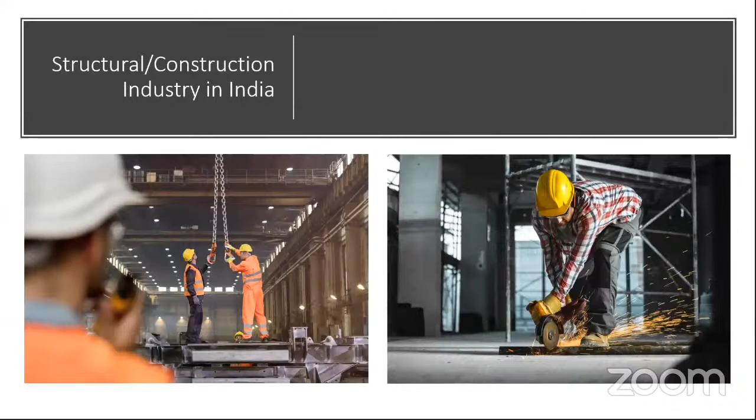So, in order to discuss the aspects or attributes that we need to improve in the structural industry, let us first focus on what limitations or what are the features that we are lacking in the construction industry or structural projects in our country. So, if you look at it in the broad spectrum, most of the construction projects are vast in nature. They are so huge, and it involves multiple disciplines working towards achieving progress in a large scale project. So when it involves multiple disciplines working on a single project, we need coordination to be one of the key roles that helps us in achieving the project successfully.

So if you look at when you're working on a structural project manually or without the use of building information modeling tools, we miss a lot of coordination, or the coordination becomes too tough with all the emails and written communications or oral communications going forward and backward. So the coordination becomes very tough without the 100% utilization of building information modeling, and lack of coordination can cause failure in our projects. The other feature wherein limitation occurs is communication.

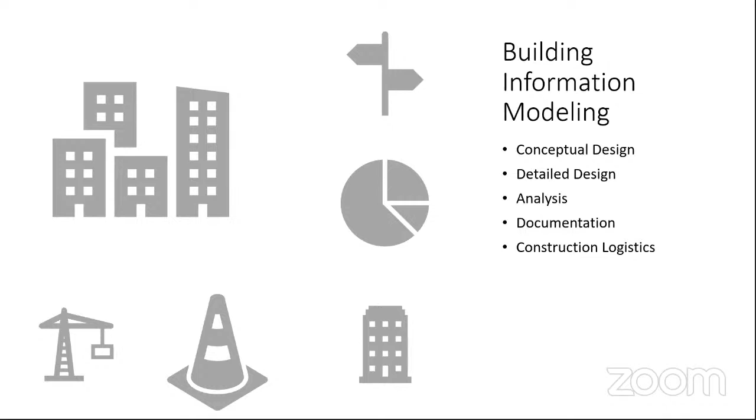So you're going to associate all varieties of information using the building information modeling concept. Let us proceed further to see how we are going to do it step by step.

As I said, building information modeling is a concept that helps us associate information related to the construction process. Building information modeling in construction is nothing but—whenever you're working on a project manually, how do you work on it? You work on multiple Excel sheets.

As an architect, you have to figure out how you are going to create the layout, how you are going to create the model, and how you are going to prepare a schedule of doors and windows, and how you want the building to be ventilated, what the lighting requirement of the building is.

You are going to have a different set of design sheets, and as a structural engineer you might have a different set of Excel sheets—what loads are acting on the building, what the foundation layout is, what the soil geotechnical report says, what the bearing capacity of the soil is, what type of foundation you need, what kind of member it is, whether it's a steel or concrete structure, whether the building members are load bearing or not. All this structural information you work on as a structural engineer.

If you are a mechanical engineer working on the project, you will focus on heating and ventilation requirements. If you're an electrical engineer, you will be working on laying out the power conduits and power circuits for the building. All these details, multiple discipline people will be working on multiple design sheets.

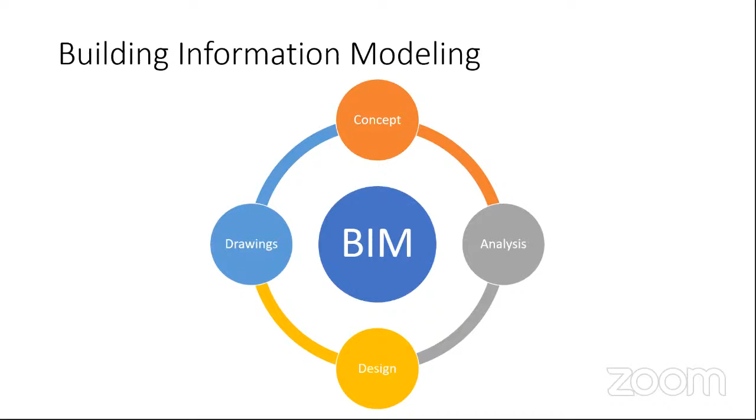When a person is executing your design on the field, he's going to look at it and understand how the formwork is going to be, how the rebar layout is going to be, and then he can proceed further to issue the bar bending schedule and proceed to execute construction of the building.

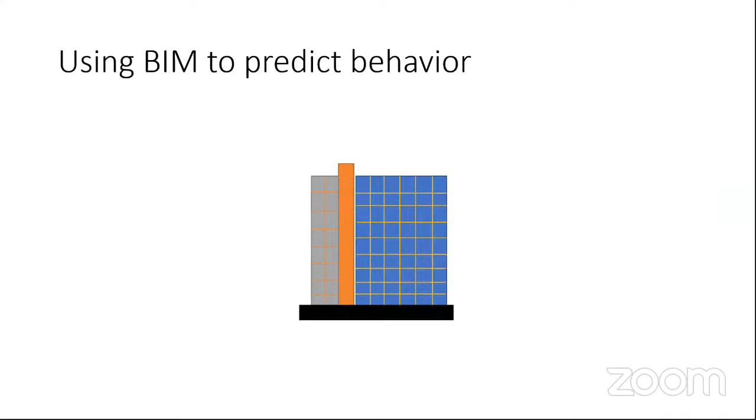Similarly, you can use building information modeling tools to predict the behavior of the project. For example, when working on a BIM tool, you have 100% coordination between an architect and a structural engineer, or a mechanical engineer, building contractors, electrical engineers, managers or supervisors. You need 100% coordination to achieve sustainability or efficiency in your projects.

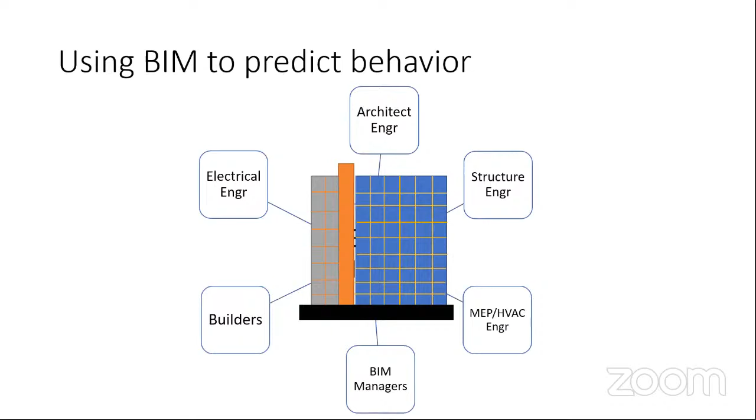So that's what we are going to learn - how we achieve coordination as well as how we work on the computation part of the project. As discussed, building information modeling helps us achieve coordination. But in the coming slides, we'll see that BIM is not only about coordination - we also associate BIM tools with specific numbers to compute the design results for our project.

If you have previously worked in the construction industry, or seen tasks executed there, you might be aware that we use tools like AutoCAD to create drawings in 2D space. What happens when you create a drawing in 2D space? It's not a wrong practice to create your models in AutoCAD.

It is slightly inefficient because you're manually and repetitively creating the views again and again, creating a projection of 2D views using AutoCAD. You might have to create the elevation view, draw the section view, and create all the projections manually. So if you have an error in the plan view, it will replicate in the elevation view, replicate in the section view, and reflect in every other view that you are creating.

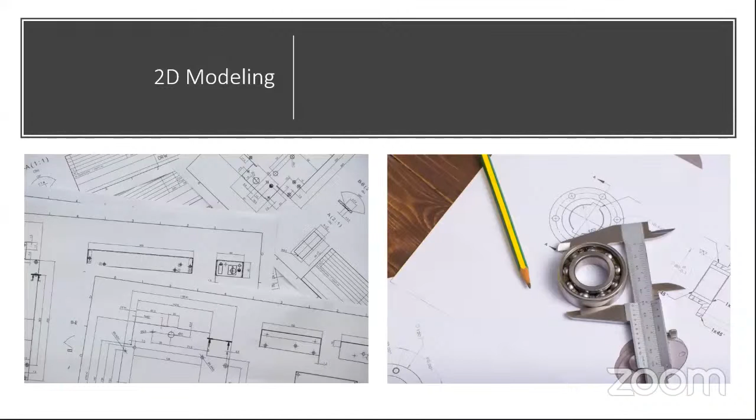When you are working on 2D modeling, you have to repetitively make a change if you change it in one view. As human beings, you might miss out on changing the element in one of the views, and this is going to build up as you work on a huge or humongous project. This tends to reduce the efficiency involved in completing the project documents.

All this information associated with the building goes within your modeling, and you can gather all this information just by looking at your 3D model, which is slightly impossible when you're working on a 2D modeling tool.

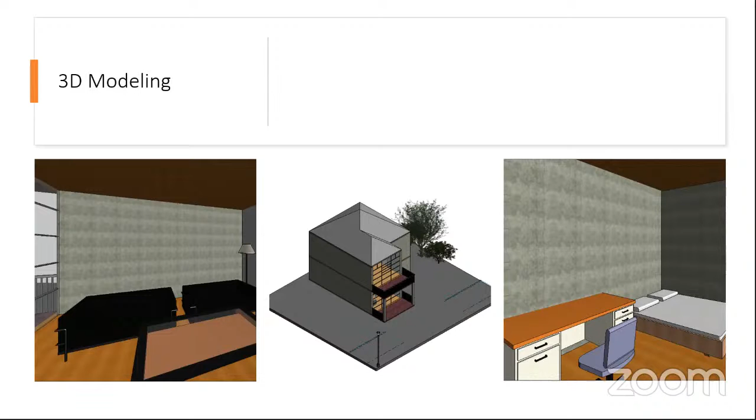One additional advantage of using a 3D modeling tool is, for example, if I change the location of the living room set, this is going to be reflected in every other view. I do not have to go back to every view to change the position of the element. The change is going to be reflected in real time, and it saves me a lot of time and improves efficiency.

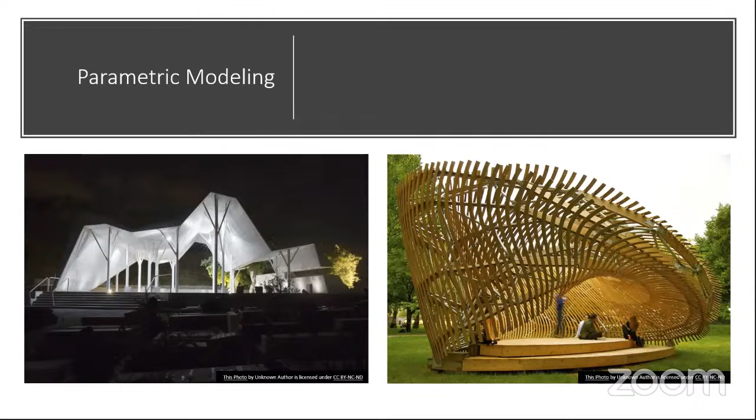When you're working on a 2D CAD tool, building a parametric tower is a very tough task, and you have to pay additional attention to complete the execution of the project. But when you're working with a parametric tool like a BIM modeling tool, this is much easier, and you can execute the project with even more efficiency in completing it.

Similarly, you might wonder what information is associated with the building information modeling tool. We have been talking about a lot of information, but let us see what types of information are associated with the project.

The information can be physical information related to the project, or material-oriented information, such as what material, what quantity of material, and what is the unit cost to date of the material. All this information could be associated with the material data.

And energy and thermal performance of the material. For example, if you want your building to perform to a certain energy and thermal performance rate, all the energy and thermal performance data of the material is saved, and you can evaluate how sustainable it is to energy using a building information modeling tool.

The data could also be mechanical, as in what is the heating, ventilation and air conditioning design that goes within your building.

And the primary data, or the most important information that needs to be associated with your modeling, is the cost. What is the amount that is going to cost to build this project, and is it within my budget, or is it exceeding the budget, or is it meeting the schedule? All the information associated with cost is stored as information in a building information modeling tool.

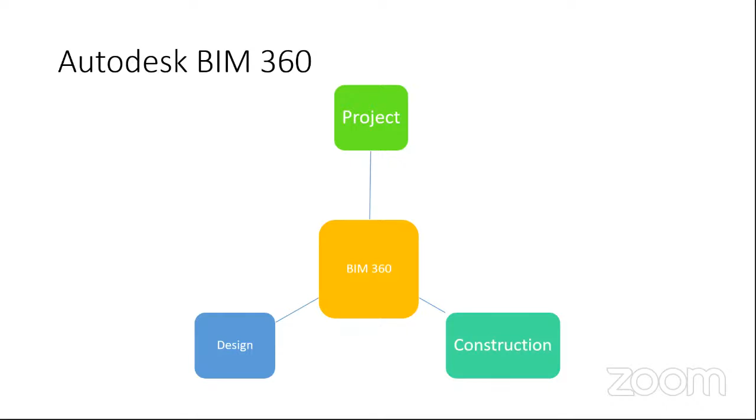This is what the Building Information Modeling 360 tool helps in integrating - a 360-degree perspective between project conceptualization, design, analysis, and construction. It helps give you a wholesome result, and helps you avoid the mistakes you have made in the past, or helps you mitigate risk to avoid uncertainties, and also gives you multiple options to complete a project.

So these are all the key features of sustainability that you want to focus upon when executing your project. BIM 360 also improves sustainability by helping you manage your technical resources, as in what amount of labor can be scheduled to complete a task, and thereby it helps you manage the time and cost.

Similarly, another important factor BIM 360 helps us achieve is meeting quality and standards. It's not only important to complete the project - sustainability also focuses on completing the project by meeting quality standards, so BIM 360 helps us achieve it. It also helps you track the performance progress of the project in real-time, and helps you make better engineering judgments by studying previous project data.

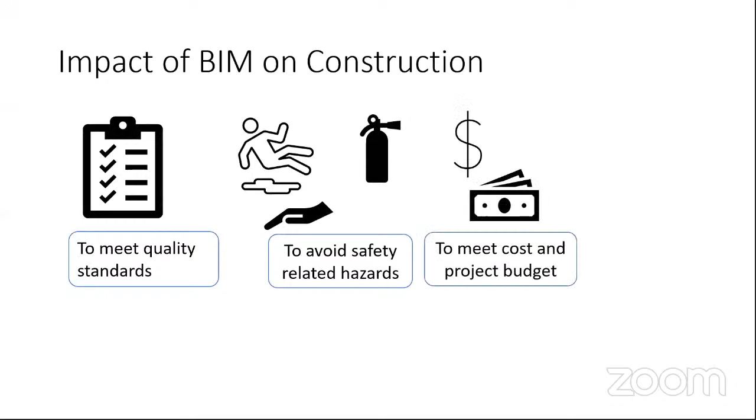So what is the impact of BIM on construction or executing the project? It helps you meet the quality standards. It helps you avoid uncertainties or hazards. It helps you meet the execution of the project within the scheduled cost and budget. And it helps you meet the project estimates.

Having previous data helps you predict the hazard pattern and enables you to have an efficient, optimum, sustainable design in executing structural projects.

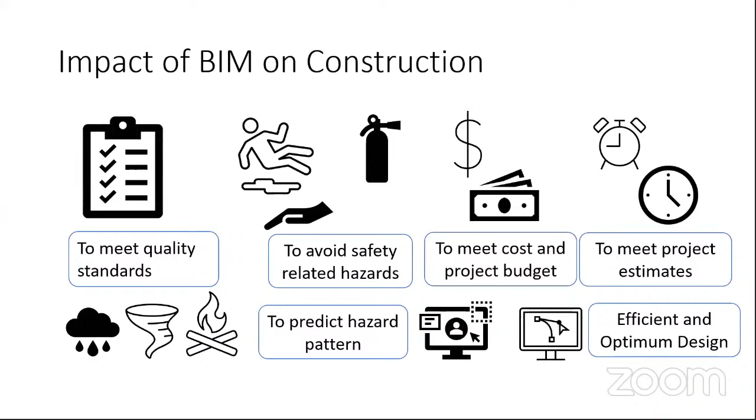So this is the impact of BIM 360 on construction, and I would definitely say that we need to shift our approach on executing projects more towards BIM tools, which will help us execute our project within the scheduled time and budget, and help us improve efficiency in the construction of our projects. Thank you.